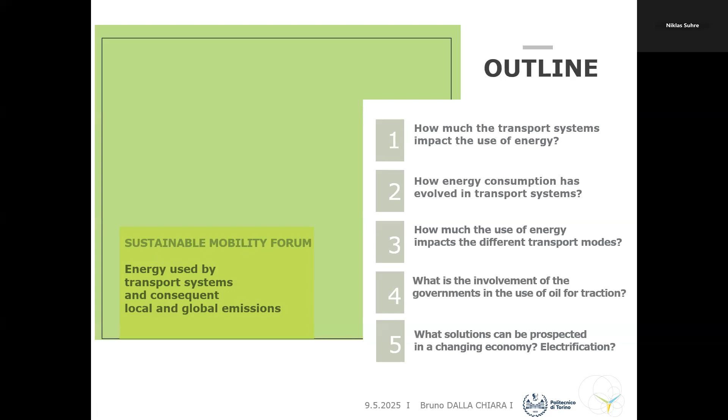Fourth, a bit less technical but much related to our future possible solutions: the involvement of governments in the use of oil for traction, oil-derived fuels. And the fifth point is what solutions can be prospected in a changing economy concerning electrification or whatsoever. We will see that. So let's start.

If you take any book from the last decades of the last century and search in the first pages what is a transport system, you will find that a transport system is typically based on three elements: the traveler, the infrastructure, and the vehicle.

But if you look at more recent literature and research, you will find that a lot of publications deal with energy, because while in the last decades energy was considered a part of the transport system but not so relevant, nowadays it has become important, because as we will see shortly, we rely mainly on one energy source, that is oil, crude oil, and oil-derived fuels.

So when we put in question the use of these sources, this becomes relevant in the transport system as a whole. If you look at literature, you will find a lot of publications concerning efficient public transport, intelligent transport systems, well-used vehicles, new solutions, electrification, engines, new powertrains, and decarbonization. This means there is an increase of attention on this subject, and we are exactly in the years when this has to be considered deeply in order to find a path for the future transport systems.

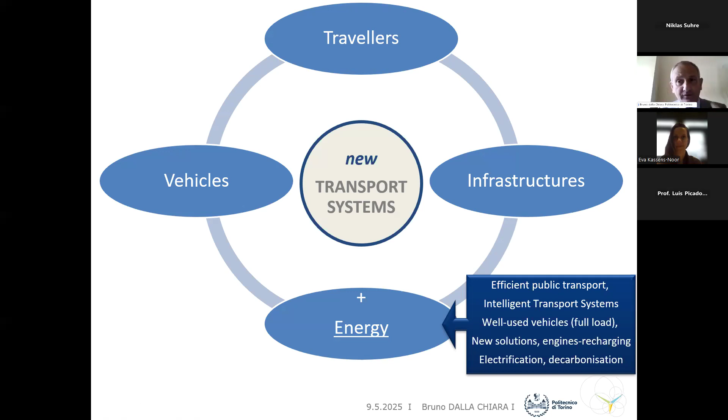So I start with a few pictures concerning our cities in Europe, at least a bit more than one century ago. You can recognize London, Milan, and Paris. You can see that people were walking, using horse carriages. There were some tramways - some of them were already electrified, some others were pulled by horses.

Then one century ago, what happened? If the goal one century ago was to guarantee diffused motorization, to avoid the use of horses - which left something on the roads that provoked diseases and stink - and to allow people to travel longer distances and bring freight for certain distances, then diffuse motorization was probably a goal of one century ago. And this goal has been reached.

As you can see on the right side, in the case of Paris, in the bottom part of the picture, you can see exactly the same street. So horses, people walking, and horse carriages have left the place to cars, buses, tramways - and unfortunately the situation is not always like in the second picture with all that traffic, but what we have reached is diffuse motorization.

And with that, since we have chosen one source, as I said before - crude oil - though the first car was actually electric, and there were already some experiences with hydrogen. But the choice was to have a liquid fuel to be poured into a tank, and it was much easier for everybody to move that way. There were some question marks concerning the use of oil-derived fuels, but we will speak about that later. Anyway, this has taken place in a regulated, controlled way, and we have arrived at that point.

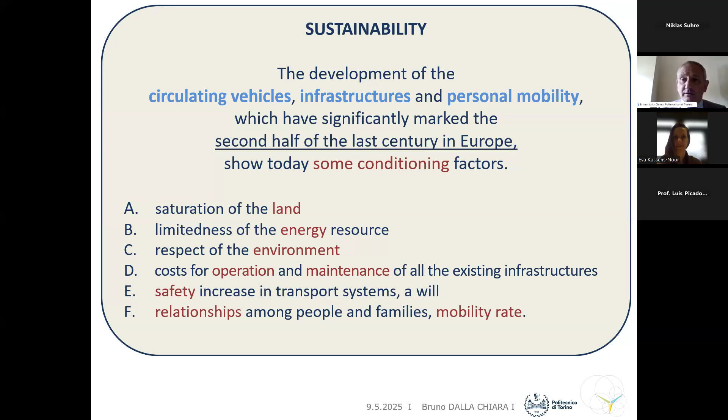And last but not least, something related to the increase of mobility—a mobility rate which could, let's say, not favor relationships on a daily basis, or even working on a daily basis for many people. All this has brought us to the context of sustainability in the transport domain.

Sustainability, as you probably know, is constituted by three main elements: environmental, economical, and social. If you apply this concept to the transport domain, you can recognize that space, air, and energy can be coupled with the environmental aspect of sustainability, while production, operation, maintainability, and updating of infrastructures can be coupled with the economical element.

Safety, together with security and the intensity of mobility, can be coupled with the social aspect of sustainability. So this can bring us to a definition of sustainable mobility.

I would say goods to be transported—I would not like to use 'mobility of goods', but mobility means therefore responsible, implicitly, movement of people and goods that balance efficiency, environmental stewardship, and socially equitable cost.

So these variables that I mentioned before can be measured: space, energy, environmental impact at local and global level, then economical aspects—cost for operation, for maintenance and so on—safety, and movements per unit of time.

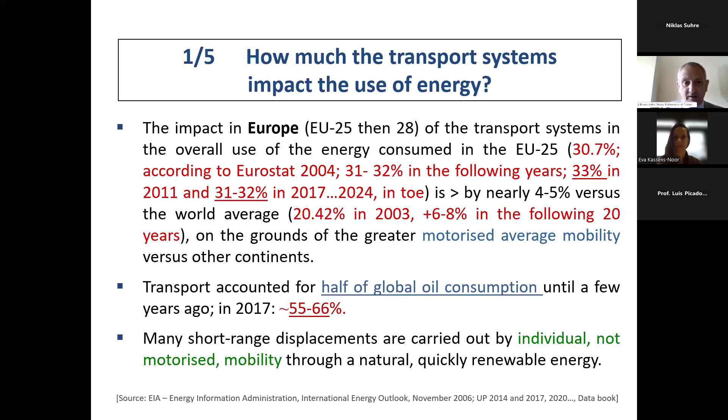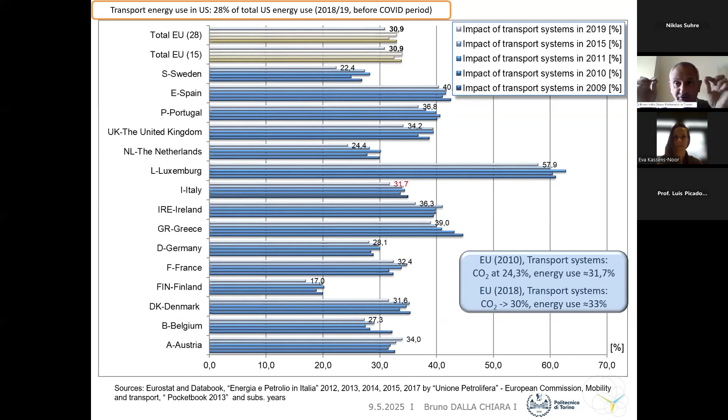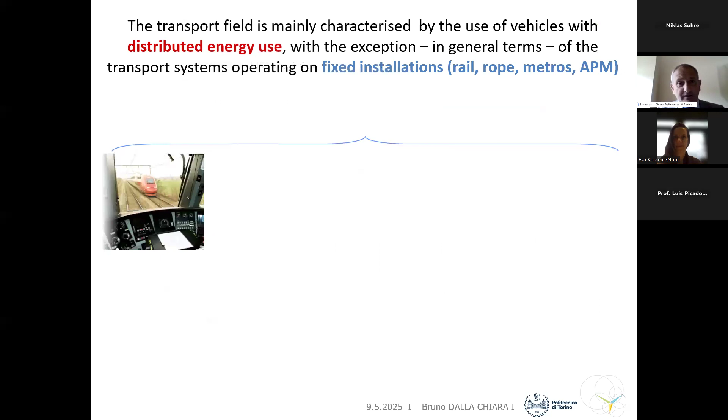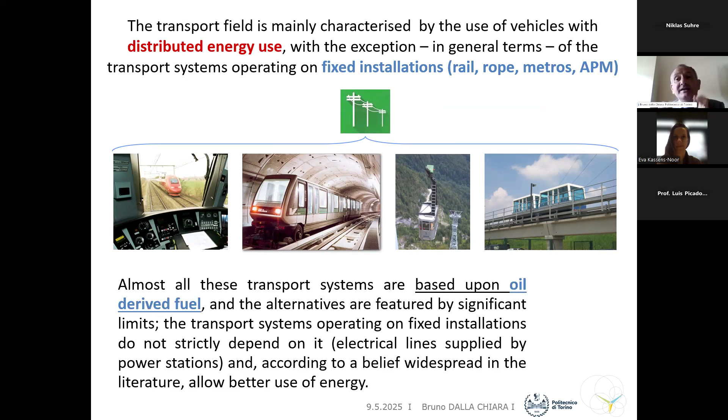Given that, we can see how much of a near monopoly condition I mentioned before. We can distinguish that both in Europe and, as an example, the United States, the impact of crude oil on the energy consumption in these areas of the world is more than 90%. It was something like 96% in 2011, and nowadays we are around 91, 92%, given some activities I will tell you about later. All other sectors in the world - industries, agriculture, services, buildings - can typically rely on the electric grid. Transport systems, being mobile by definition, do not, because vehicles have to carry liquid fuels with them, at least this has been done so far, that they can burn on board to allow for mobility. Given that, railway systems, undergrounds, cableways, and automatic people movers are those systems that can rely on the electric grid, so they can be independent from crude oil.

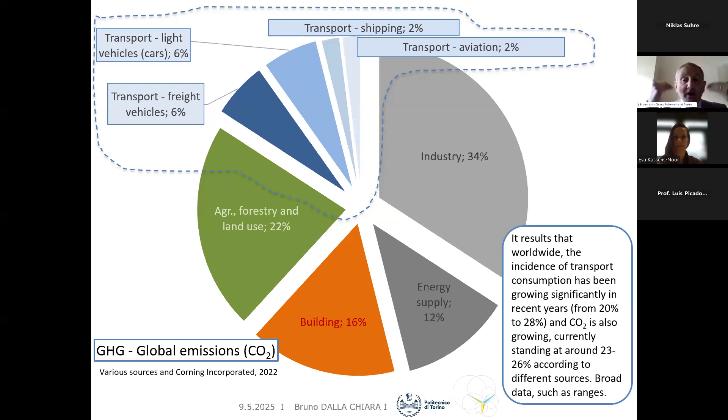What does this mean? This means that in the world, the impact of transport systems in terms of CO2 emissions is increasing. In Europe it's nearly constant with some oscillations, but in the world it's increasing because motorization is taking place in areas like China and India, where the population is much higher than that of Europe. And from the combustion of fossil fuel, we have a certain quantity of CO2 emissions.

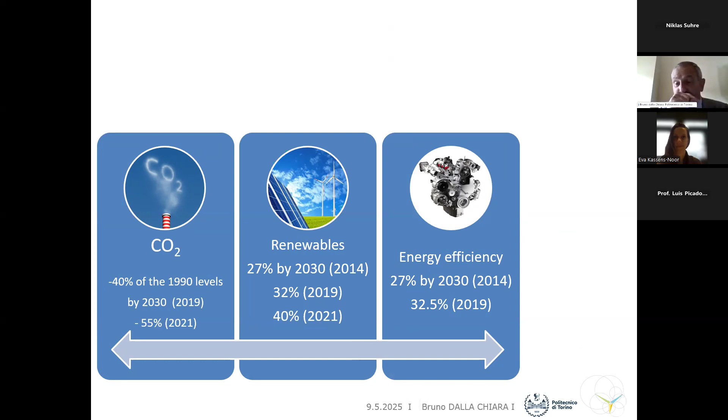What about the position of the European Union? Some years ago, starting from 2014, then more relevantly in 2019 and 2021, the European Union stated it had two main goals: reduction of CO2, and increase of renewables and energy efficiency. In 2021, it stated it wanted to fit for 55 - meaning, with respect to 1990 levels, to reduce the impact of CO2 from human beings by 55%, with this goal set for 2030... so how can we obtain these goals?

Modal shift, because we can easily understand that rail systems, metro systems, people movers reduce their impact in terms of energy consumption and consequently emissions, since they can rely on the electric grid - this is the main reason. Second, we can let powertrains migrate from the present ones to new greener ones, and also use intelligent transport systems. Third, use applied maths for optimizing the use of our vehicles, in particular when dealing with freight.

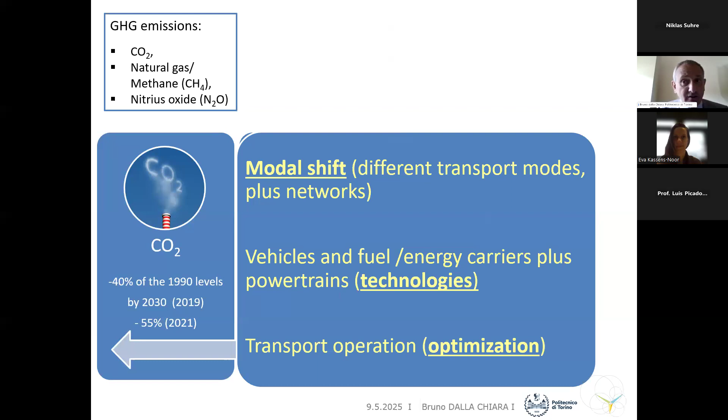Okay, what about greenhouse gases? I spoke about CO2, which is one main component of greenhouse gases, but if you release natural gas into the atmosphere, this increases greenhouse gases, and the impact is 20-25 times higher than that of CO2, given the same quantity of gas. Nitrous oxide also contributes to the increase of greenhouse gas emissions. According to some literature, even the space debris surrounding our world, with more than 1 million little pieces, can contribute too - I don't know, it's not my subject, but I tell you for being more complete.

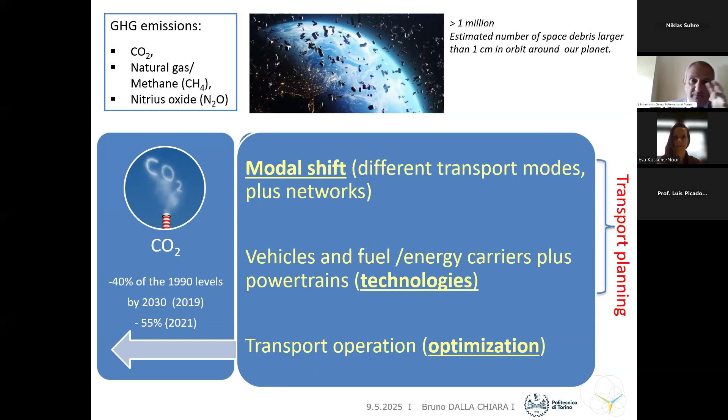So we know from literature, from our daily experience, from our knowledge, that we are looking towards decarbonization. Consider that decarbonization means to reduce or avoid the use of carbon, but we have to keep in mind one thing in the transport domain: there is no liquid fuel at normal temperature in the world which does not contain carbon. So decarbonization in absolute terms is not possible, at least if we want to continue to use a liquid fuel, unless we move towards some alternatives that we will see later.

So what can be the path, the instruments for reaching or at least pursuing decarbonization? Well, one is defossilization. That means if we let plants grow, and these plants can become a fuel for our engines, then during their growth they absorb CO2 from the atmosphere, and by burning the fuel obtained from them you create some emissions of CO2, but this could be neutral at the end. This is called defossilization - sorry if I've simplified the subject at a very basic level.

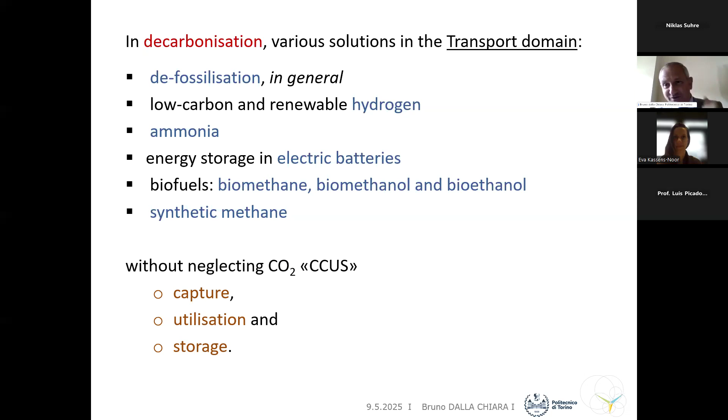Ammonia - you can produce ammonia and burn it, and this is another possibility. Energy storage in electric batteries is the solution connected to electrification, in terms of full electrification, but we can also speak about gradual and partial electrification. Then there are biofuels, biomethane, biomethanol, bioethanol, and synthetic methane. All the synthetic alternatives are also called e-fuels. We shouldn't neglect the so-called CCUS, meaning to capture, utilize, and store CO2, but for the time being this process is very expensive, though it's a possibility for the future. Let's not forget that the main way to reduce CO2 is to grow plants.

So we try to make a lot of efforts in the transport domain and in the energy domains, but we can also grow plants. So the first question was how much transport systems impact energy usage, and we understood it's nearly 1/3 in Europe, and 1/5 in the world, becoming 1/4. In terms of CO2 emissions, the values are a bit lower, thanks mainly to railway systems.

The second question is how energy consumption has evolved - how we arrived at this situation. We can look first at the incidence of single transport modes, then the circulating road vehicles, and the fuel consumption.

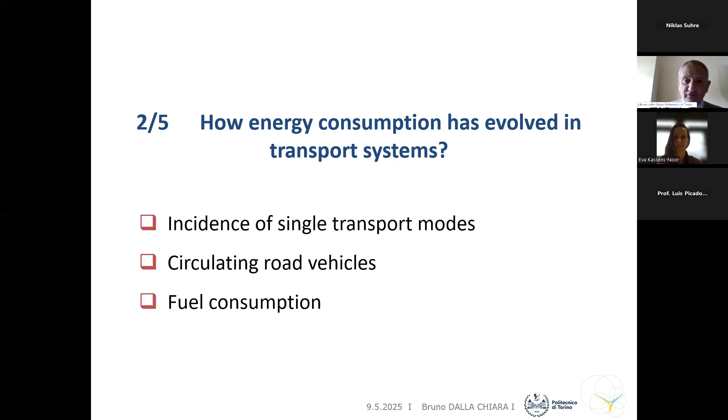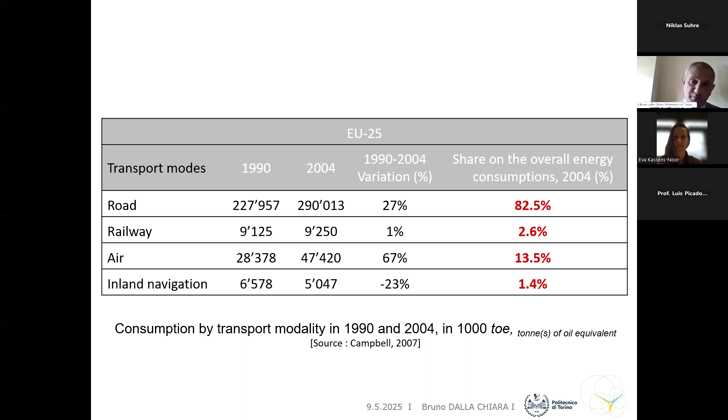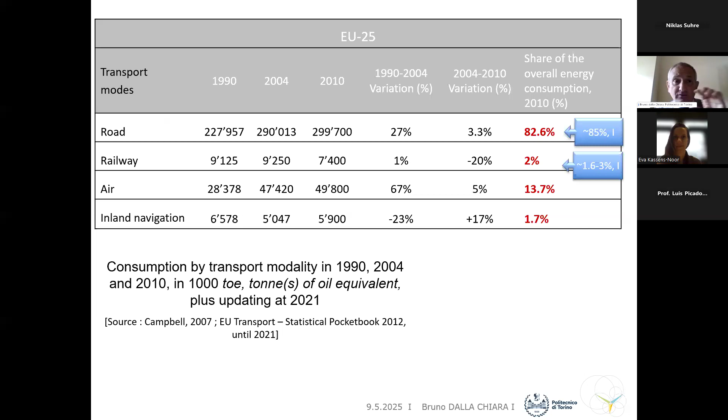Some years later - a bit less than 10 years later - the values in light blue are from the period just before COVID, and these values didn't change much. Road transport remained the most relevant one, rail transport had some variation, and air and inland navigation stayed more or less the same. If you refer just to domestic aviation and domestic navigation, the impact of road transport reaches 94.5% in Europe. So this means it's absolutely relevant.

So if we want to decarbonize the transport system, we have to look in particular to road transport, and we have to keep in mind that rail transport doesn't impact so much in terms of energy consumption, because it relies on a more efficient transport mode.

This comes from the fact that the contact of the wheel on the rail is rigid and nearly a point, while on the road this is an area, which has pros and cons. Being an area increases consumption, but it also helps adhesion, so you can climb higher grades and accelerate and decelerate in shorter spaces. This cannot be done in railway, where you have to guarantee long spaces.

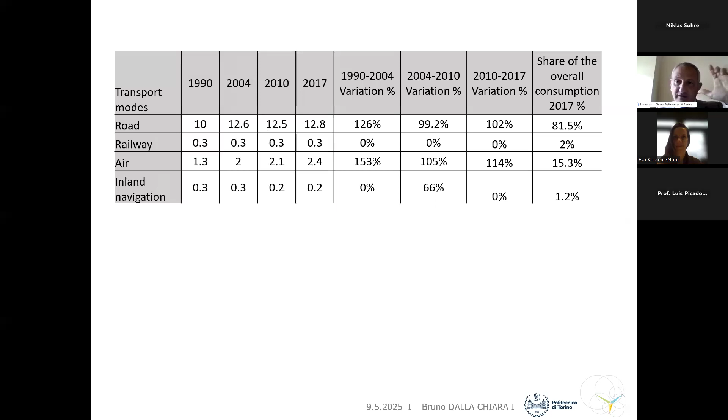More recent data show more or less the same values. So what I wanted to show is that over the years these values are more or less conservative, with a quite relevant role of road transport.

We've arrived at this situation looking at the curve representing circulating vehicles. This graph refers to Italy. Shortly I'll show one concerning Germany, but they are all similar in Europe. They are like S-curves. For those who studied economics, the S-curve is typical of a product: concept creation, concept development, market development, business optimization, and then what?

How many of you have a horse carriage at home? I suppose nobody, but it had an S-curve quite longer over the centuries, and then it dropped down when the car was invented. Now we have to think about what the future will be.

We will discuss this in the next seminar with me. But what I'm telling you now is that each car registered over the decades has implied an increase in consumption that has brought us nowadays to what we've seen before.

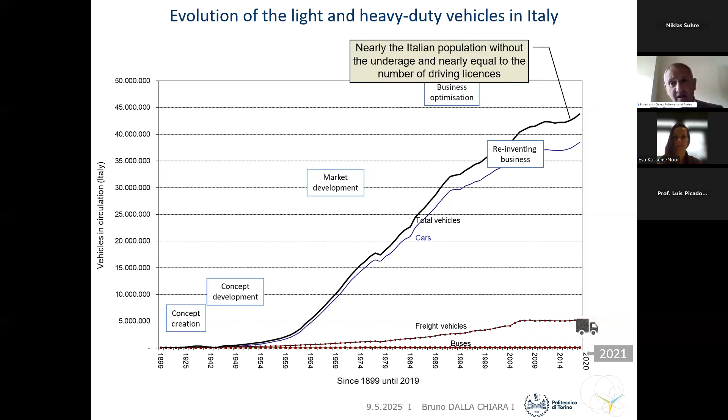Nowadays, more or less, we have saturated the market, because for each person able to drive, at least in Europe, you have one car, though not necessarily of ownership. So we have saturated the market, and this can be shown by this graph.

This refers to registrations in Italy, and you can see that starting from 1995 until nowadays these registrations oscillate, while before that date they were continuously increasing. This is the crisis of motor cars, because production was no longer what we were accustomed to before the beginning of this century. So it's a substitution instead of a saturation of the market.

The situation in Europe, as in the United States and Japan, with conservative values in recent years, is not the same in the world. In the world we have a continuous increase of motorized vehicles, and China, which started motorization in the 80s and 90s and mainly in this century, already had one-fifth of the vehicles circulating in the world by 2008.

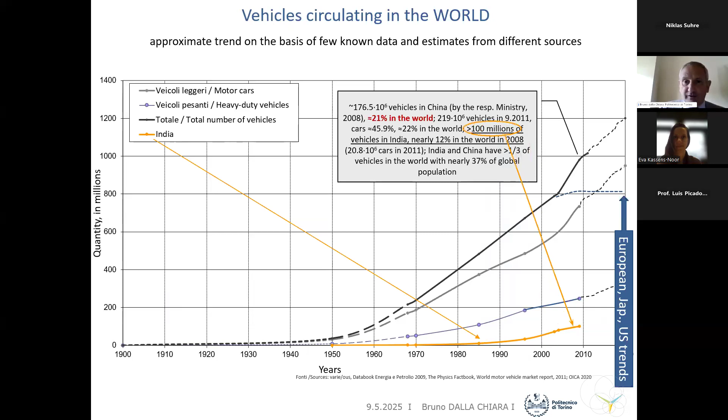So the saturation we've reached in Europe is far from complete in countries like China and India, and this contributes to global consumption because of the percentages we've seen before, and to global emissions. Given this, what about the number of vehicles in the world?

We've seen that, for example, in Italy we had 40 million people able to drive. You take 60 million, the number of inhabitants in Italy, reduce it by the underaged, and find the number of people able to drive, also excluding old people no longer able to drive. This number corresponds with the vehicles circulating.

The same is more or less true in all European countries, but not in the world. In the world we are nearly 8 billion people, and the number of circulating vehicles nowadays is nearly 1.3 billion. So the motorization index in the world is much lower. But if we continue to increase motorization, we have to be worried about energy consumption and emissions.

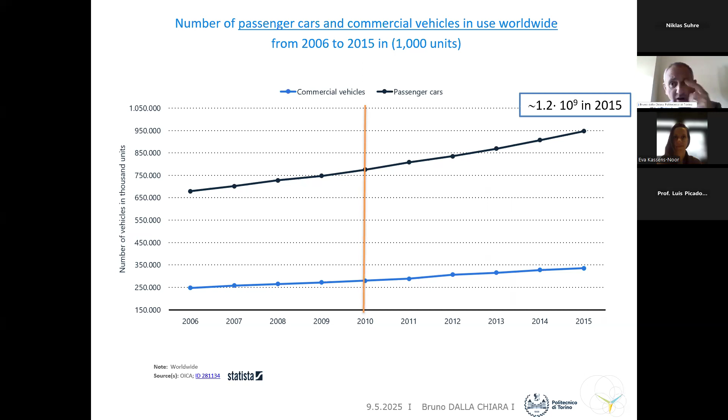This was the number in 2015: 1.2 billion. Now we are around 1.3 billion vehicles in the world. If we take India as an example, you can see there was already an increase in 2000 that brought an increase in motorization and traffic there.

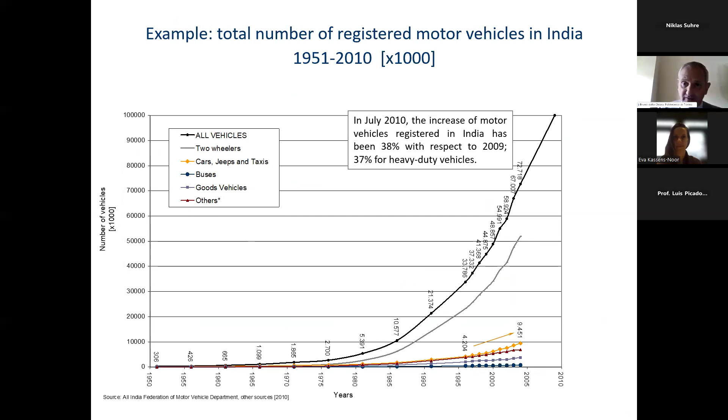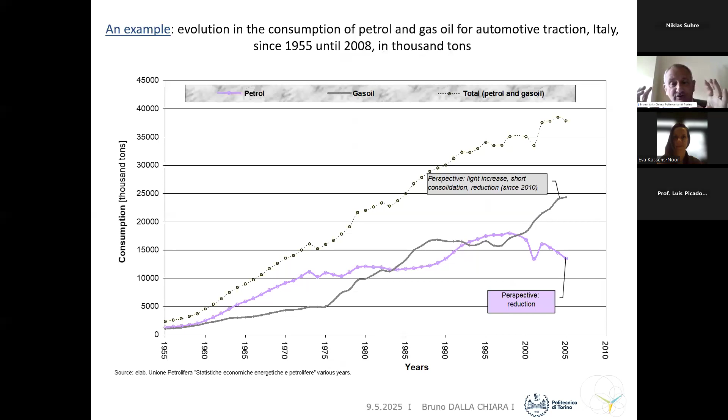What about energy consumption? While we've seen a continuous increase in circulating vehicles and then a roughly constant value in recent years, increasing smoothly, energy consumption is actually reducing, for some main reasons: new engines, more efficiency, and a different mobility that uses other transport modes more than in the past. For example, high-speed rail lines were not present 20 or 30 years ago, depending on the country.

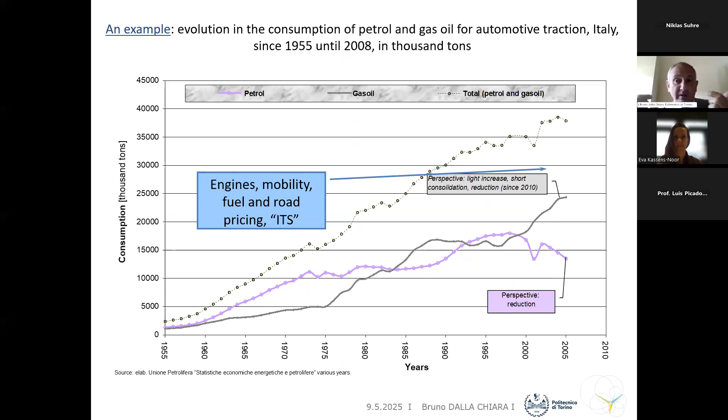This increase of rail mobility has contained the usage of fuels in road transport. Then fuel and road pricing, which has an incidence, and intelligent transport systems. If going from A to B I have the minimum path and avoid traffic because I'm informed about that, this contains the use of emissions. Sorry, I make little examples just to let this be understood.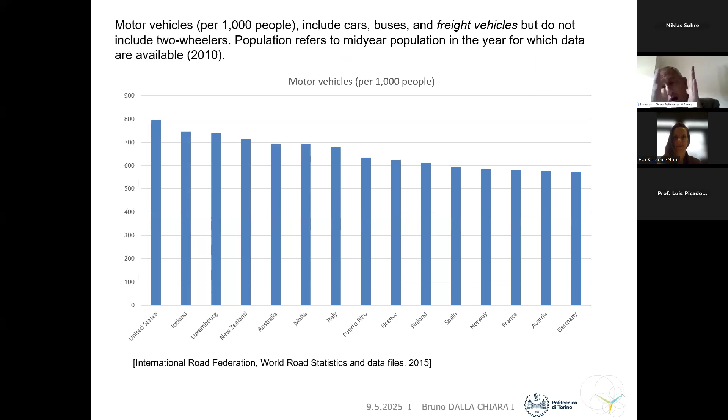As regards the present and the future, the forecasts agree typically on a reduction of fuels for road transport because of the reasons I said before. But if we look at the motorization index in the world, in 2015 the United States had 800 cars for each 1,000 inhabitants, meaning nearly one car per inhabitant, while Italy, Greece, Finland, Norway, France and Germany were around 5 and 6 vehicles per 10 inhabitants. China and India were at quite lower levels, so their motorization index is quite lower.

Some years afterwards these values have changed a bit, with countries changing their position in the world. There are also different sources, but more or less the situation is like that, and China and India still have a motorization index that is quite low.

If we look at how mobility has taken place in recent years, these data regard million passenger kilometers traveled by road. Around 2004, 2005 there was a reduction in the increase of daily mobility, in the whole traffic of passengers by car. In those periods we had some modifications in our society: the use of internet, and in many European countries the increase of high-speed rail, so a change of mode, and also a reduction in natality, so the population is nearly conservative. Of course, if you don't increase population, you don't increase flows either.

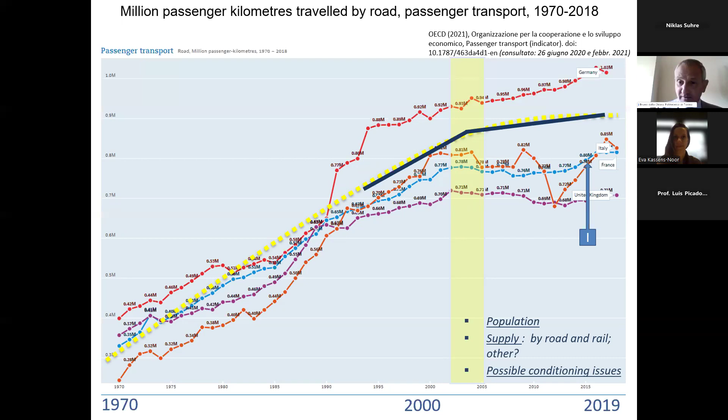So what about absolute numbers in terms of fuel consumption? Then we will arrive at alternatives. Again I use an example to let you understand the concept, but we can make a lot of examples if we want. In 2005 in Italy, for example, we had 29 plus 18 billion liters of petrol and gas oil consumed for road transport, so this makes nearly 48, 49 billion.

In 2008, according to what I said before, this value was reducing, to something like 24 plus 7, 31 billion liters. Consider that gas oil is much more used than petrol because heavy-duty vehicles, which travel long distances, mainly use gas oil, and within motor vehicles for private use, those who used vehicles more typically, at least in the past, used diesel cars. This brought a much higher consumption of diesel compared to petrol.

What about China and India? If we look at, for example, these 31 billion liters, to obtain tons you have to multiply by 0.7 or 0.8, the density of an oil-derived fuel, and you obtain something like 25, 26, 28, a value that is near here.

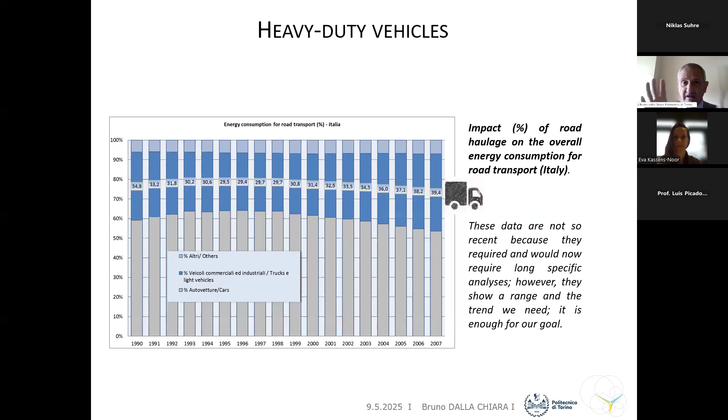What about the incidence of heavy-duty vehicles? This is just an analysis: they oscillate between 30 and 40%. So given 100 of road transport in terms of energy consumption, that of heavy-duty vehicles is around 30 to 40%. If we look at this vehicle category for freight transport, as I said before, the main fuel is oil-derived fuels, gas oil.

Then if you look at railways, I always take the same country as an example so you can make a comparison. Railway transport had, in the last 10, 15 years, an impact in terms of tons of oil equivalent a bit more than 1 million 3, 1 million, 1 million point 3, 1 million point 6.

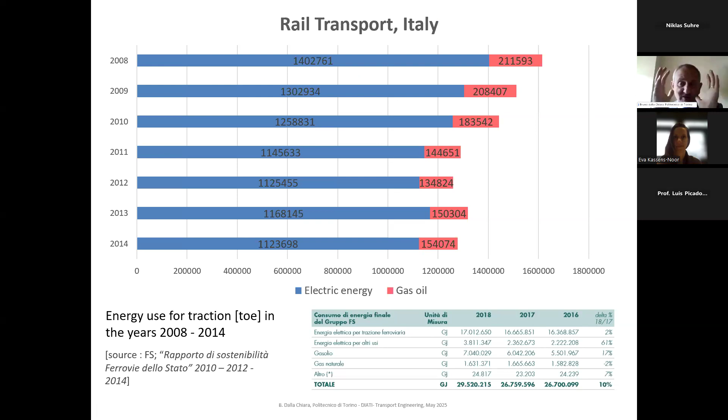And this can be distinguished in this graph, with also some more recent data. But what you can appreciate is that the impact in terms of energy usage of rail transport is much lower than that of road. So how much does the use of energy impact the different transport modes? We have understood the impact of transport as a whole and its evolution. Now we have to see inside each transport mode what is the impact of energy usage.

Well, it varies a lot. In road transport, we have vehicles with two wheels, then 2 axles, 3 axles, 4 axles, 5 axles, up to 12 axles more or less. So this varies a lot also in terms of energy consumption, mass, and number of variables. In rail transport, it's more homogeneous. In air transport, we will see shortly, so as in maritime transport.

So if we want to consider a homogeneous area of road transport, we can refer to freight transport - transport of goods typically by heavy duty vehicles. If you look at literature and different publications, you can find that the impact of energy consumption within road haulage is more or less between 24, 28 and 38 percent. This means that if you have a variation in the cost of crude oil, this is much felt by road hauliers. If you look at railways, this does not happen because you have a variation between 4 and 6%.

The 6% is referred to the fact that you have frequent acceleration and deceleration phases and many stops, like for example in a metro system, in an underground. While if you look at national railways, typically you will find in the national budget of this railway 4 or 5% more or less. This is the incidence of energy on the whole production of the service.

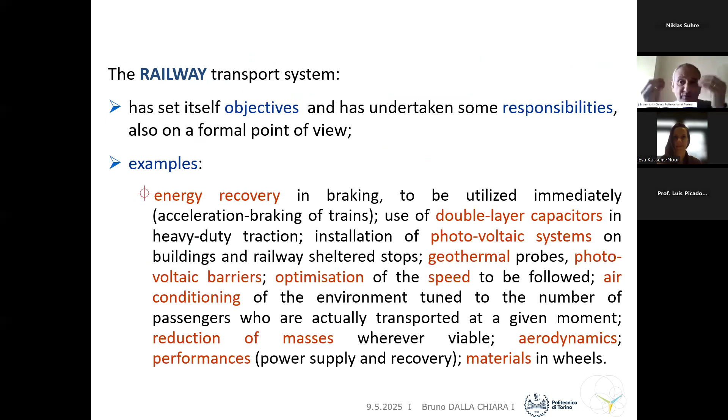Notwithstanding the low incidence of energy in rail transport, there is a number of activities that you can see here in red: energy recovery, optimization of speed, materials, and so on, which can contribute to the reduction of energy consumption in the rail field.

In air transport, some years ago, we had something like 14, 20, 25, 32 percent oscillating, but in recent years we are around 35, 33, 40%, and this is the incidence, so as in heavy-duty vehicles, of energy consumption in the whole cost of operation of air transport.

Okay, maritime transport. Maybe you know that, well, we don't travel anymore by ships, except for amusement, not for passing from Europe to United States or going towards East Asia. While maritime transport is much used for the transport of goods in the world.

Nearly 90% of goods traveling around the world use maritime transport. So this means that it has an impact, which apparently is not so high because we are around 3% of the consumption in the world, and also emissions have similar values.

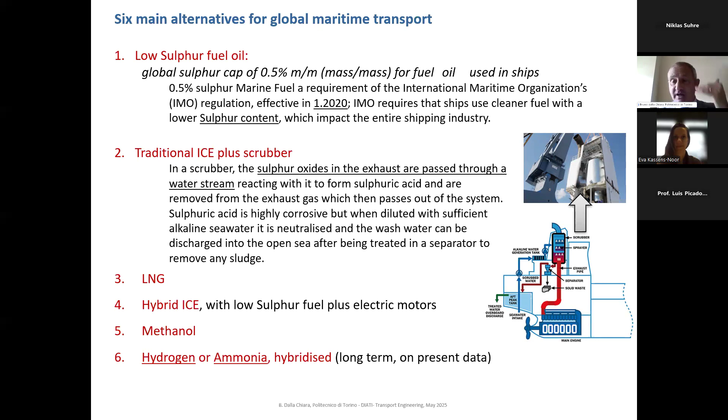Fourth point: what is the involvement of governments in the use of oil for traction? In the last century, we have seen a benefit for everybody - for the vehicles, for the industry that had to produce these vehicles, for the infrastructures, because civil engineering had to build new infrastructure to satisfy the increase of motorized mobility, and for the state budget, because from fuels, the budget of the state is increased in terms of excises obtained from fuel combustion.

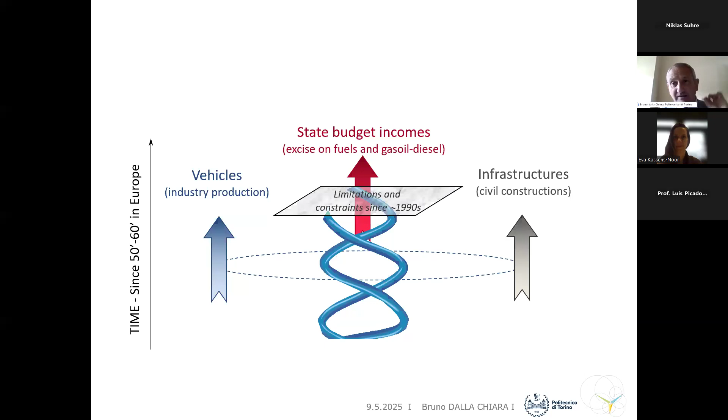Some constraints we saw before when defining sustainability were introduced in the 90s. I refer again to Italy here, but I have a slide shortly referring to Europe. More or less the incidence of excises, taxation on a liter, on the cost of a liter of petrol or diesel, is around 48, 50, 55, nearly 60%. So this means that when vehicles circulate, a great amount of money arrives to the state budget.

So if we decide to electrify, we have to consider all these things, but we also have to think about one thing: what are the natural resources that typically a transport system uses? Energy, air, and space. As seen just before with air - we don't pay for the use of air, but we use it in terms of oxygen for combustion, and we emit something at local or global level, so CO2.

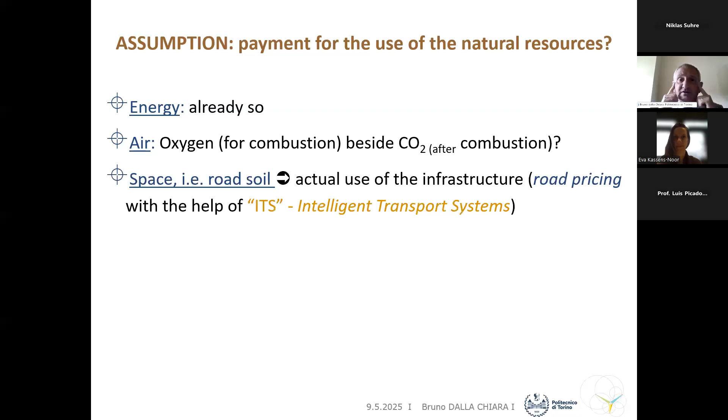And space - do we pay for the use of space by road transport or any transport mean? In rail transport, yes, because trains pay according to distance. But in road transport, we don't pay according to distance, except in some cases - for example, German motorways, Italian motorways, French motorways, and in some cases Spanish too, I'm not sure, but anyway according to distance you pay. But if you use the normal network, you don't pay according to distance. This concept is called road pricing - you pay according to the usage you make of the infrastructure.

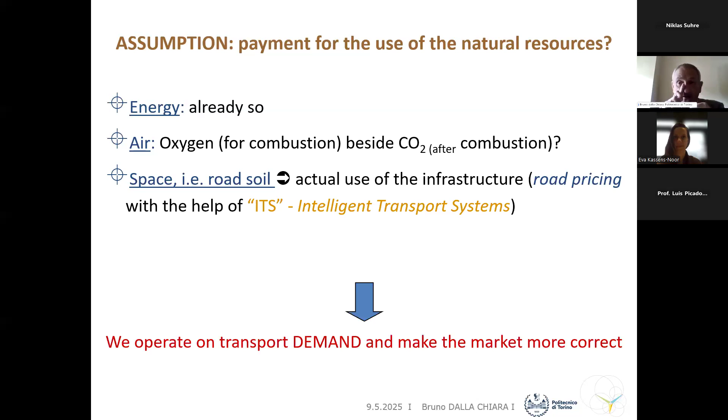So if we look at electrification, we have to consider the state budget, the alternative energies, the emissions, and the fact that for the budget of the state, some alternatives should be found. So we arrive at the last point.

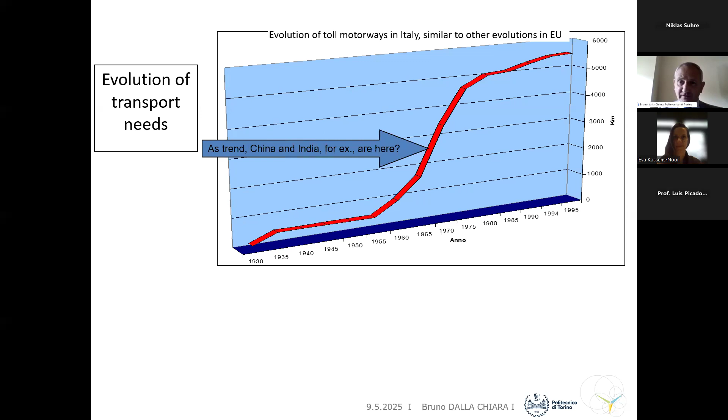We have seen in many European countries an evolution of infrastructures like this picture shows, so in the 70s, 80s, and 90s. China and India are in the growth phase of these infrastructures. But the new goals for us, for Europe at least, are efficiency, quality, safety, and security - those typically found in literature. We are not looking anymore to diffuse motorization because we have reached that goal.

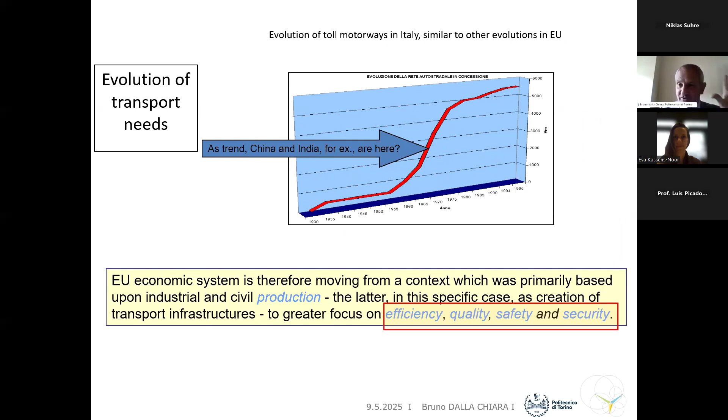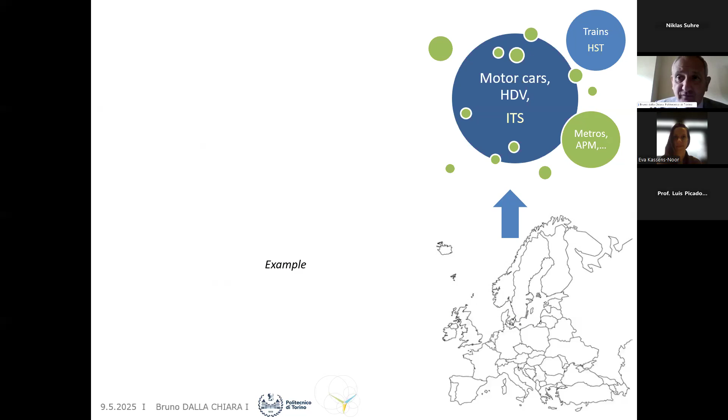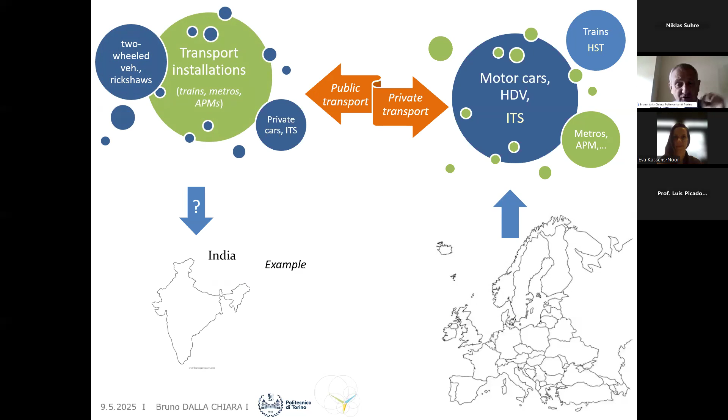So we have two main alternatives: either to move on high-speed railways with motor cars, buses, public transport, metros - and we have listened to the lesson before by Professor Francesc Robusté - or as an alternative, we can use much more public transport, which means planning and intervening on the territory. This has to be done, in my point of view, in countries where motorization level is still low and increasing much.

But more fixed installation means less emission, and this is clear, and this means a role of the state in this context. Then more private vehicles means more emissions, unless we deal with new engines, new hybrid vehicles, and electric vehicles, as far as they can satisfy the demand.

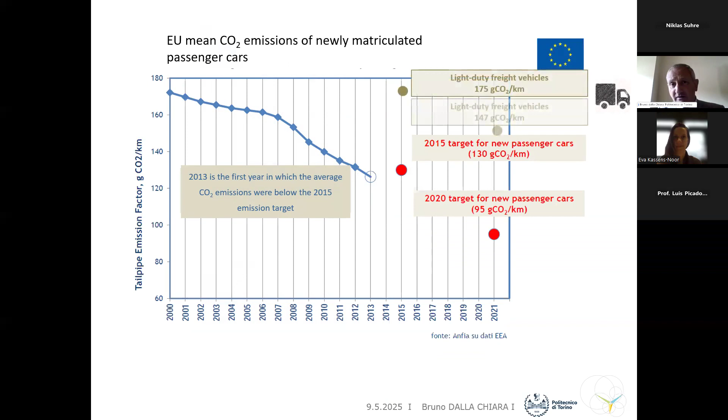And what about the position of Europe in this context? Europe has said, let's reduce the CO2 emissions by vehicles at production level. In 2015 it was 130 grams of CO2 per kilometer, in 2020 it was reduced to 95 - this number referring to light-duty vehicles. But this has been done also in other parts of the world, as you can see in this graph, because Mexico, Brazil, India, Canada, United States, China, Japan, South Korea are looking at this reduction of CO2 at the production level.

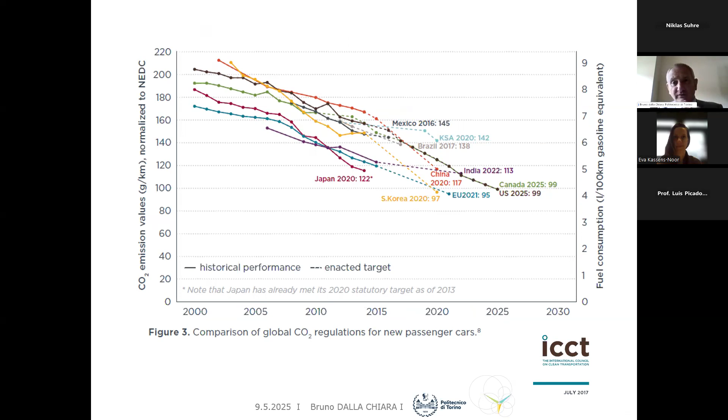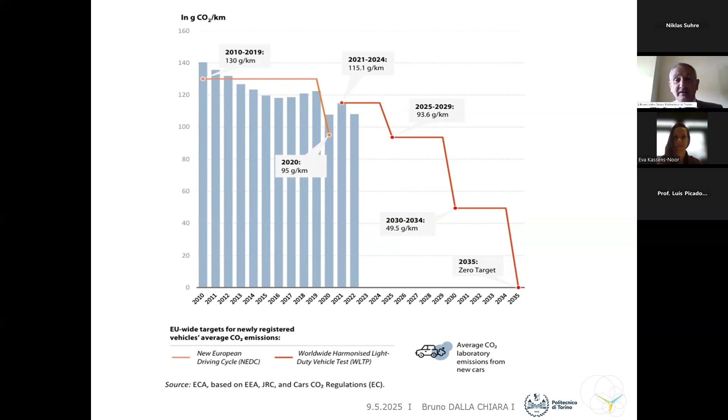Europe is at the value 95, you can see it there. And this value has been changed in 2023 by the European Parliament to 0. But this has to be qualified, because this 0 is calculated at the vehicle level. If we look at CO2, we know we need to calculate across the whole energy process, as we will see shortly. This is referred to the conventional driving cycle called WLTP, but we will recall this aspect afterwards.

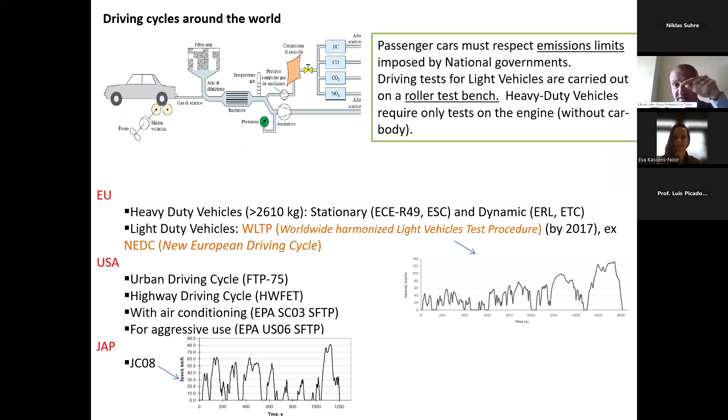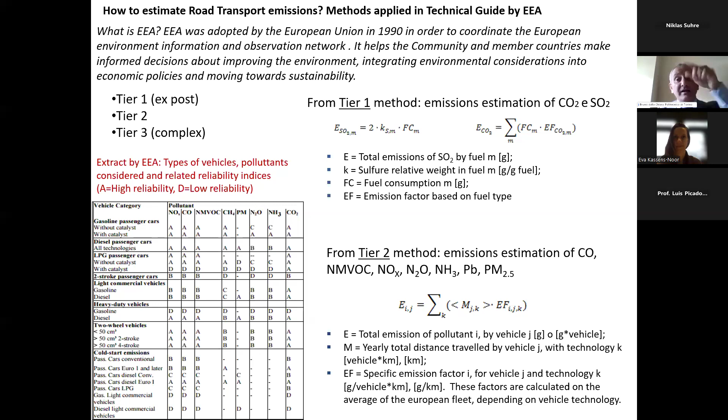If we analyze CO2 emissions just at the local level of the vehicle, then we treat the CO2 problem as someone else's problem, because the CO2 will be emitted elsewhere. So what is the solution? First, we have to calculate emissions at local level and global level. Of course, we have to pass through the vehicle, and to do that there are methodologies - let's take a rapid look at this. There are procedures referring to the WLTP, the conventional driving cycle, which allow you to calculate or estimate local emissions, but also on the conventional cycle to estimate CO2 emissions at vehicle level.

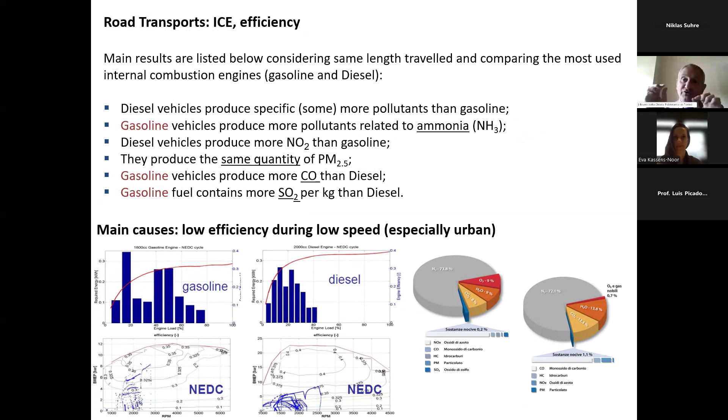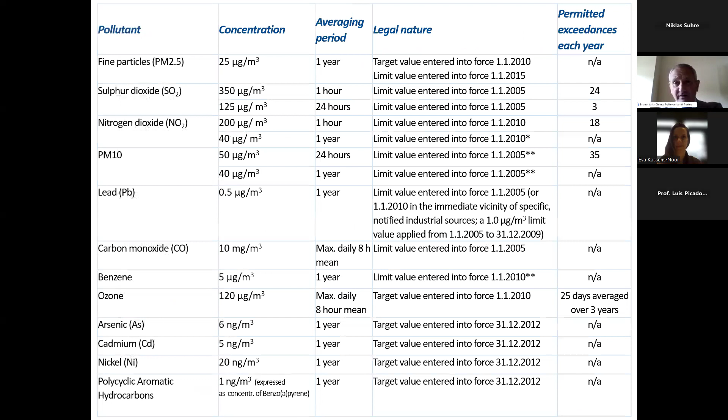Since Europe wants to look at both global emissions, CO2, and local emissions, there's this Directive 50 of 2008 that has been substituted by Directive 2881 of 2024, from November of last year. This means the European Union is looking both at global and local emissions, with a new table, the one that was mentioned also, at least regarding nitrogen dioxide, by Professor Francesco Robuste in the last seminar.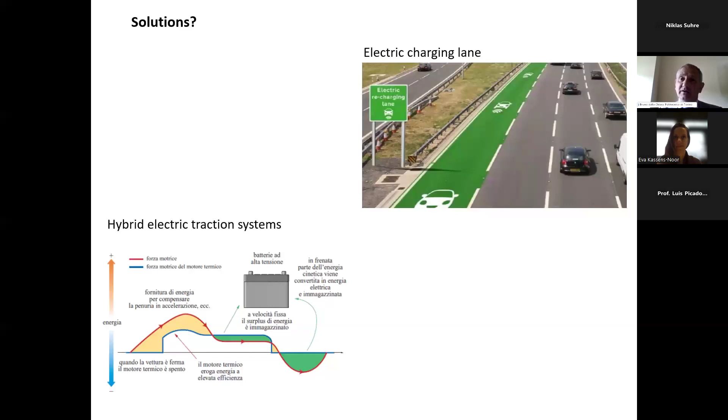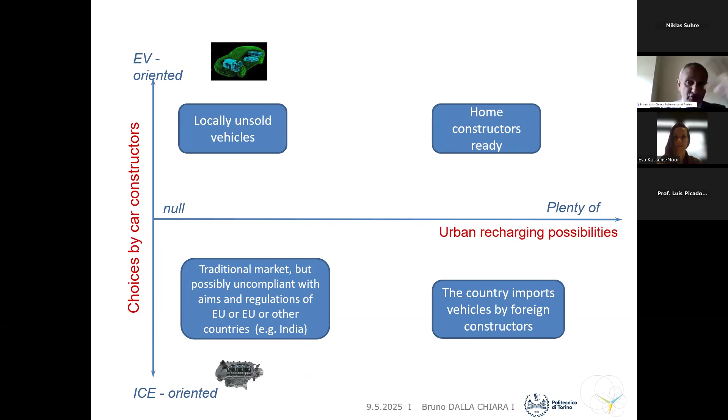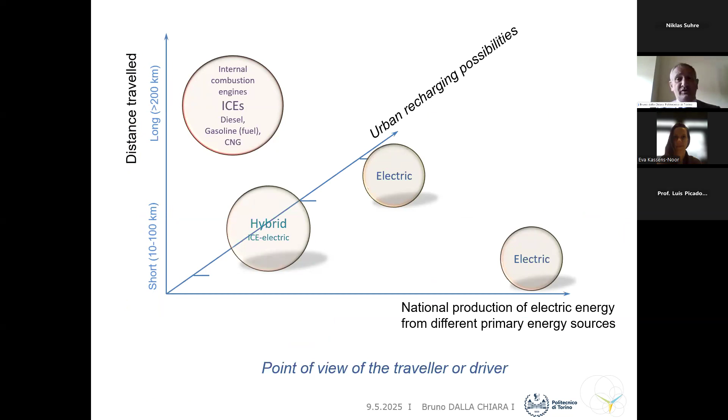Since we want to reduce local emissions, we have to find a solution. We will see this solution in my next seminar, but what I can say now is that either we go all electric, but we need to keep motorways probably with road charge while driving possibilities, and provide recharging possibilities, which implies certain calculations to avoid queues on our roads. We need to verify if distances are compliant with recharging possibilities, especially in an urban context, opening the door to a number of alternatives.

We were used to consuming crude oil, and in recent decades also natural gas, not coal of course, but we could use fuels from synthesis, biofuels, hydrogen, liquefied natural gas, and we could recharge batteries with power production plants.

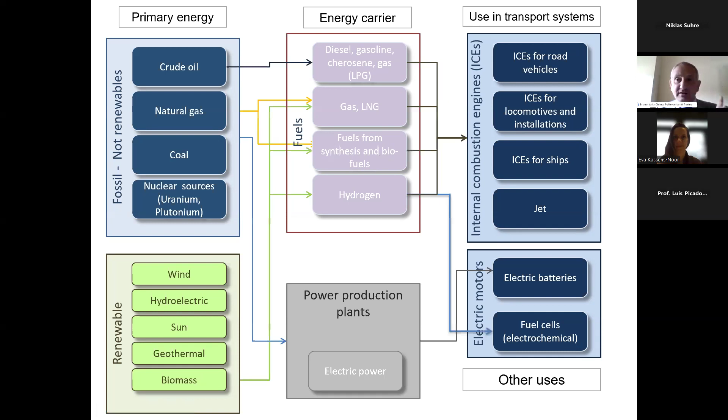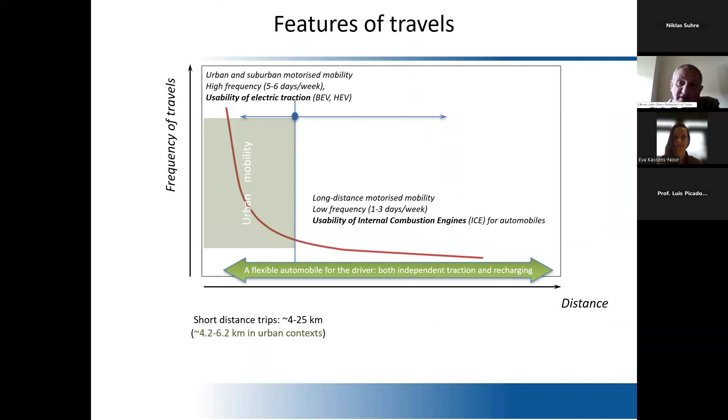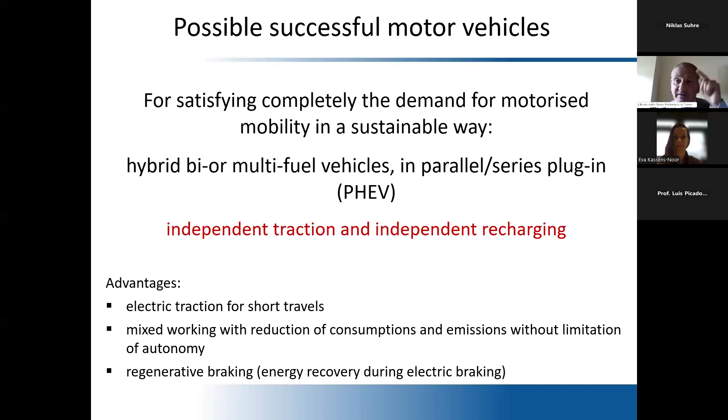These are the alternatives, we will enter more detail in the next seminar. We start thinking about a split of local travels, frequent and short, and less frequent long travels. The first could be associated with electric traction without any problem, the more extended ones with internal combustion engines. The most flexible solution is a plug-in hybrid, but it's possible that a full electric vehicle could be compliant with a person's needs, while an internal combustion engine, provided it doesn't emit much, we will see that next time, doesn't emit much.

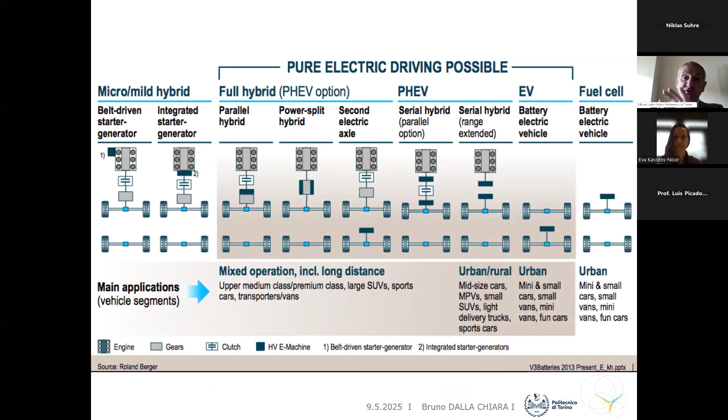This is a slide I will recall in the next seminar concerning the alternatives we have in hybridization, full electric vehicles, and fuel cells.

We need to analyze the whole energy chain, well-to-wheel, and we need to do that in the life cycle, because if I produce a vehicle in China with an incidence of coal of 63%, I produce the CO2 there, notwithstanding the fact that apparently the electric vehicle is not emitting here. So what I need to analyze is to complete the decision of the European Parliament using well-to-wheel and life cycle analysis.

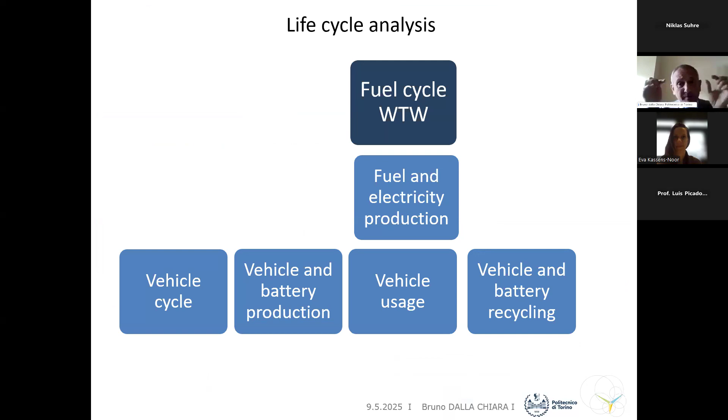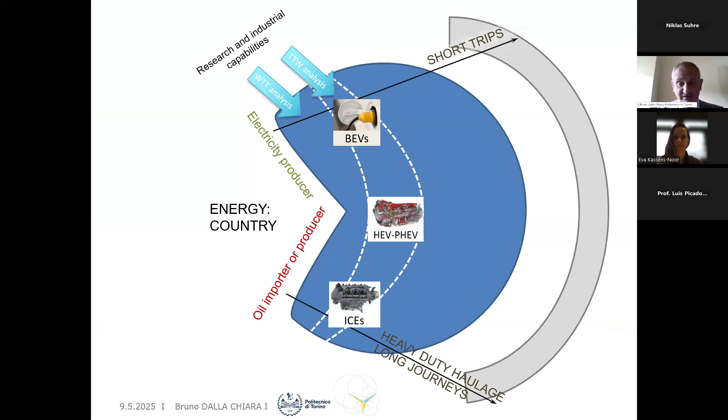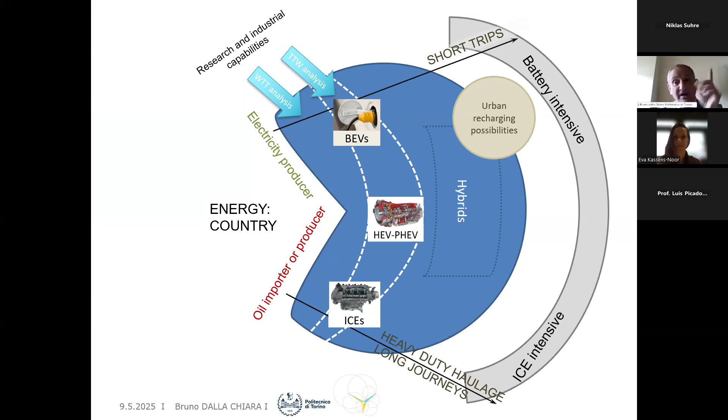I skipped this slide because I will use it next time. I just show you this graph, which represents the alternatives we have nowadays, but we will enter into more detail in the next seminar, according to the actual usage of the vehicle. There is not a single solution, there is a number of alternatives that we have to analyze in well-to-wheel and life cycle terms to understand which are the most promising in terms of energy and emissions.

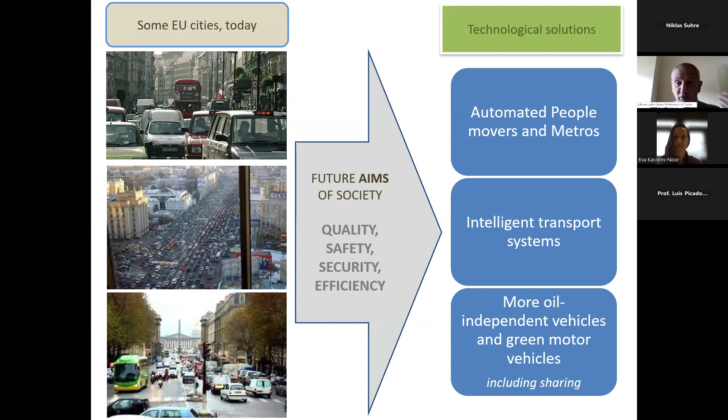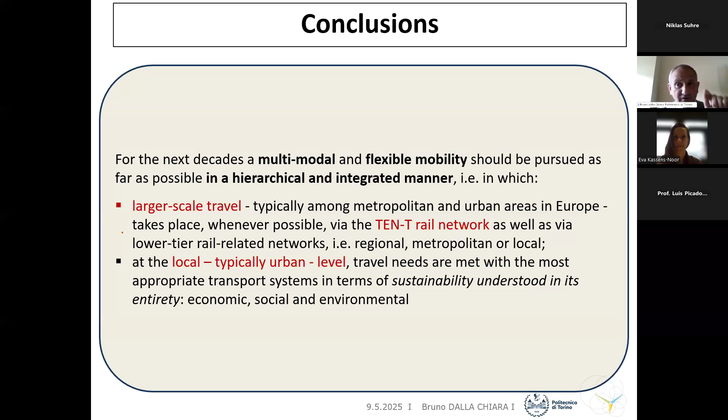Our future cities probably will have more metros, more intelligent transport systems, more oil-independent vehicles with interconnected possibilities through intelligent transport systems. And I arrive at the conclusions: we rely on a TEN-T network that is by rail, and this, in my point of view, is an excellent decision of Europe already in the 90s. At local level, we can use public transport, cars, and also cars at longer distances, but we have to keep an eye on the sustainability concept that we resumed before.

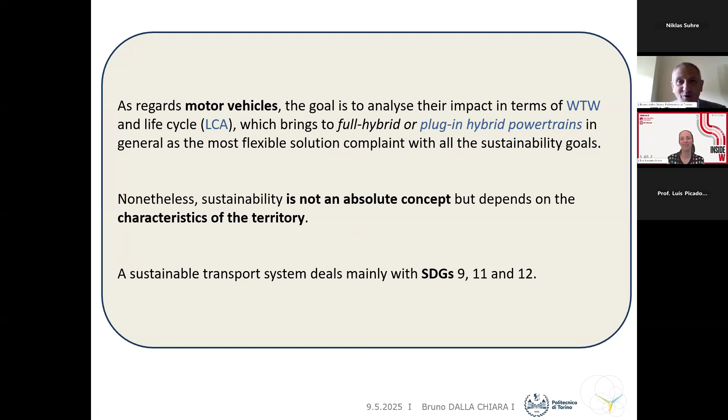The most flexible powertrains are the plug-in ones, but they are more expensive, we will speak about that next time. Nonetheless, sustainability is not an absolute concept because it depends on the characteristics of the territory. That's all, sorry if I've run a bit, but I wanted to provide you a number of basic elements for the next seminar, and I hope to have satisfied your expectations. Thank you.